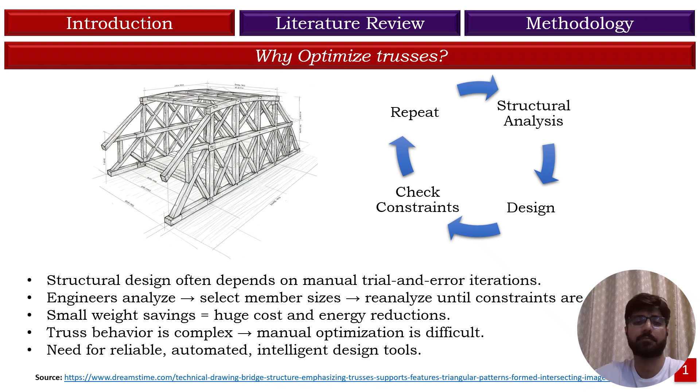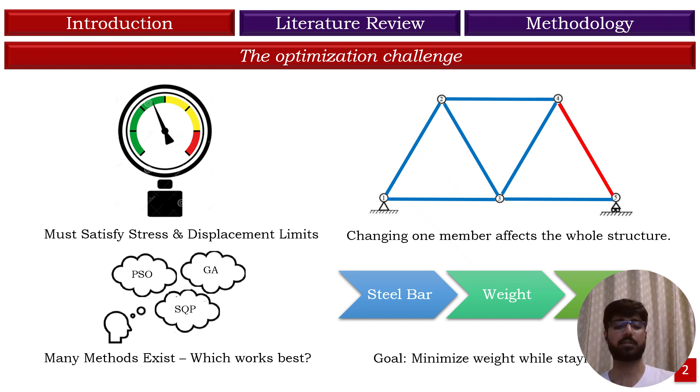The next question is why truss optimization itself is a challenge. First, every truss must satisfy strict stress and displacement constraints. Secondly, the truss members are highly interdependent. Furthermore, there are many optimization methods available, but there is no clear answer on which performs the best. And finally, the objective remains the same: to minimize structural weight while satisfying all constraints. These challenges set the stage for my research, a comparative evaluation of different optimization methods.

Based on the identified challenges, the objectives are to implement SQP using MATLAB's fmincon, along with genetic algorithm and particle swarm optimization methods, for truss sizing optimization. Second is to have a comparison of these gradient-based and meta-heuristic approaches. Third is to evaluate these methods using standard benchmark truss problems. And finally, to assess each algorithm in terms of minimum achievable weight, convergence behavior, and computational time.

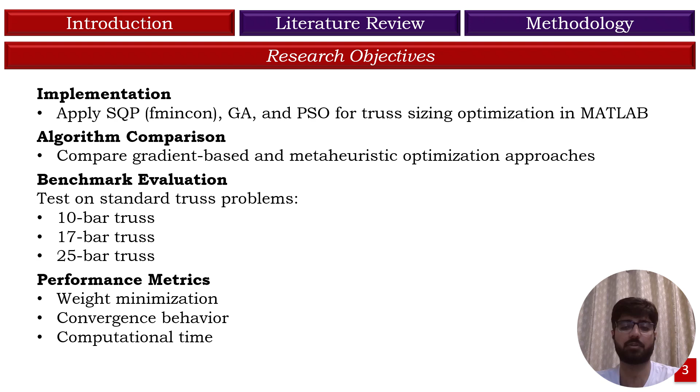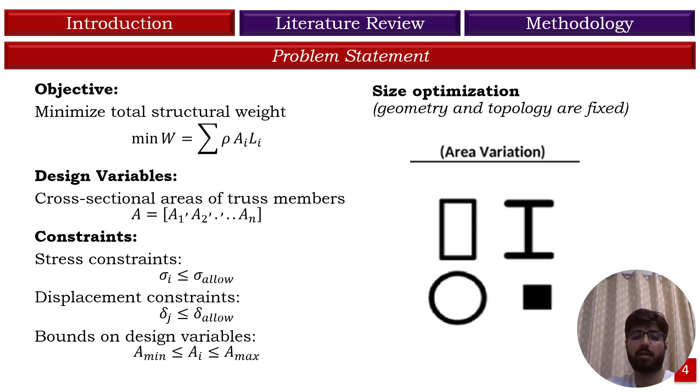Now let me formally define the problem addressed in this study. The objective is to minimize the total weight of the truss structure. Here I have focused on size optimization, in which we can only change the cross-sectional area of the members. Each design must satisfy stress and displacement constraints. Additionally, practical lower and upper bounds are imposed on the member areas.

There are two main families of algorithms: gradient-based and meta-heuristics. Gradient-based methods rely on mathematical derivatives, while meta-heuristic methods explore the design space more freely using rules inspired by nature. In this study, I have used three algorithms, each with a different personality.

Let's start with SQP, which is a gradient-based method. Imagine you are standing on a mountain trying to reach the lowest valley. SQP looks around, estimates the shape and slope of the ground, and takes a carefully calculated step downhill. After each step, it reassesses the landscape and updates its plan. This makes SQP precise and efficient. But the catch is, if the valley it finds is only a small dip and not the deepest one, it may get stuck there.

Next, we have genetic algorithm, which is like nature. It evolves the design through trial, error, and adaptation. You start with a bunch of truss designs, each slightly different. You test all of them, keep the best ones, mix their genes to create new designs, and even add small mutations. Over generations, weak designs disappear and strong designs dominate. Because of this evolutionary process, it explores the entire search space. It can find hidden valleys that even SQP cannot. But it takes time because it tests many designs before settling for the best one.

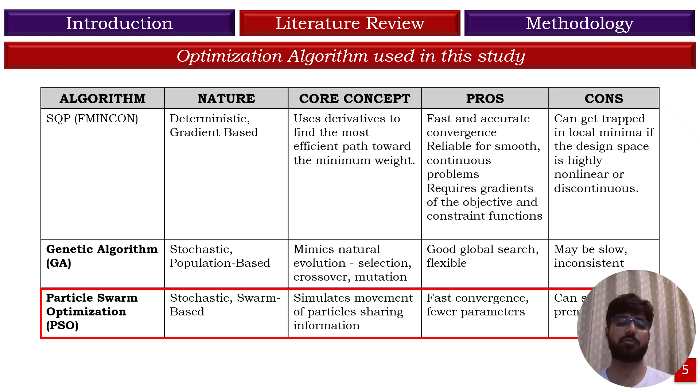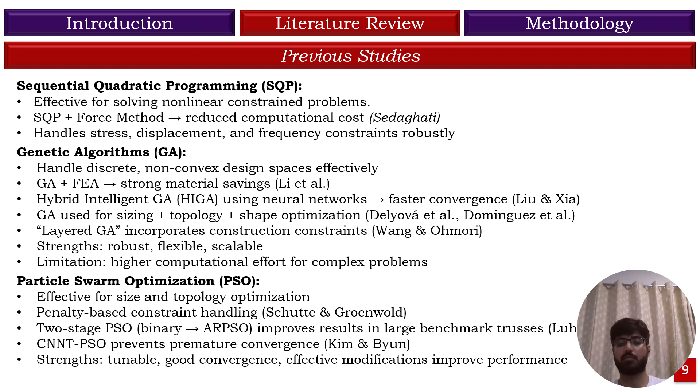This slide summarizes the main optimization methods for truss design and where my work fits. SQP is very efficient for nonlinear constraint problems, offering fast convergence and reliable handling of stress and displacement constraints. GA is widely used for discrete and multimodal design spaces and is flexible and powerful but computationally intensive. Particle swarm optimization is popular for sizing and topology optimization with good convergence and tunability.

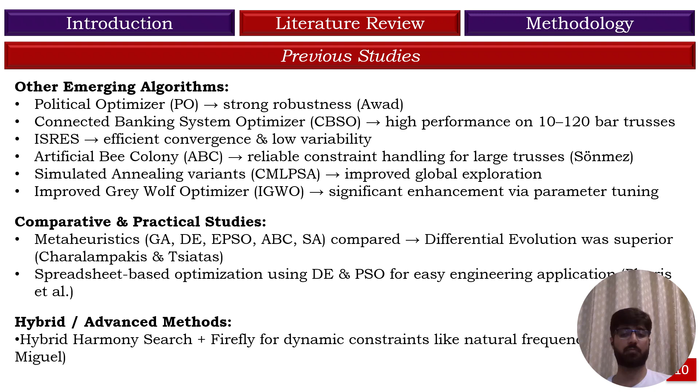Beyond GA and PSO, researchers have explored many newer meta-heuristic algorithms such as political optimizers, CBSO, and advanced simulated annealing. These methods perform well for larger or more complex truss problems. Comparative studies indicate that differential evolution frequently outperforms others in robustness and scalability. We also have hybrid methods which combine the strengths of two different algorithms. Overall, a wide range of algorithms exist, but their performance depends on parameter tuning and problem complexity.

So, how do we overcome the limitations of manual trial and error? Instead of adjusting each truss member manually, the algorithms automate the design process. The approach is straightforward: we define the design variables, compute the structural responses, evaluate the objective function, and let the algorithm intelligently update the design. This cycle repeats automatically until convergence is achieved. The outcome is much faster compared to the traditional manual approach.

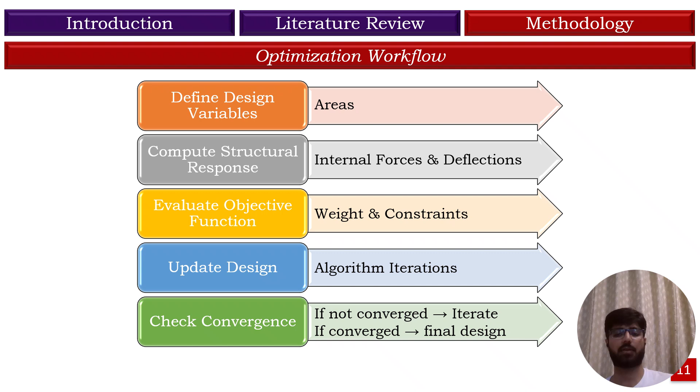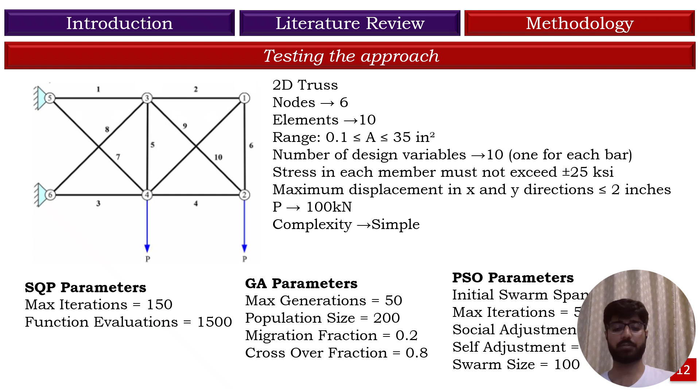Now, to test this automated workflow, we need a set of benchmark problems of increasing complexity. We start with the 10-bar planar truss. It is a classical benchmark problem, simple and well studied. It has 10 different design variables, and the area of each can vary between 0.10 to 35 inch square. We have two constraints here: displacement and stress. We have a load of 100 kilonewton applied at nodes 2 and 4. At the end, we have the parameters that we are using for different algorithms in MATLAB.

This slide summarizes the optimization setup for the 2D 17-bar truss, which is more complex than the previous one. This truss has 9 nodes and 17 elements, with each bar's cross-sectional area treated as an independent design variable, giving us a total of 17 design variables. The areas can vary between 0.1 and 50 inch square. The design constraints of stress and displacement ensure safety and serviceability. At the bottom, you can see the parameters chosen for the three algorithms for this problem to balance solution accuracy and computational efficiency for this more complex truss.

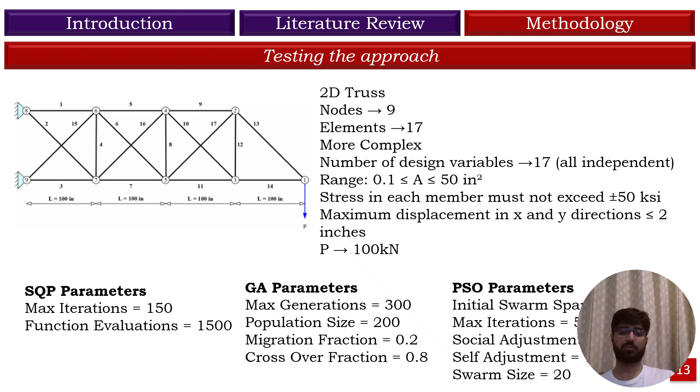Lastly, we have the 25-bar 3D tower truss. It has 10 nodes and 25 elements. The elements are grouped into sections, so we have 8 different independent design variables.

The area varies between 0.01 to 35 inch square. The compressive stress limit is uniform, while the tensile stress is different for all the design variables. The structure is subjected to two independent loading conditions, which adds to the complexity.

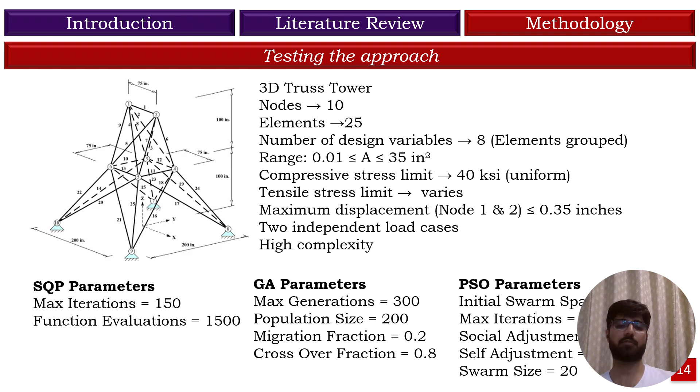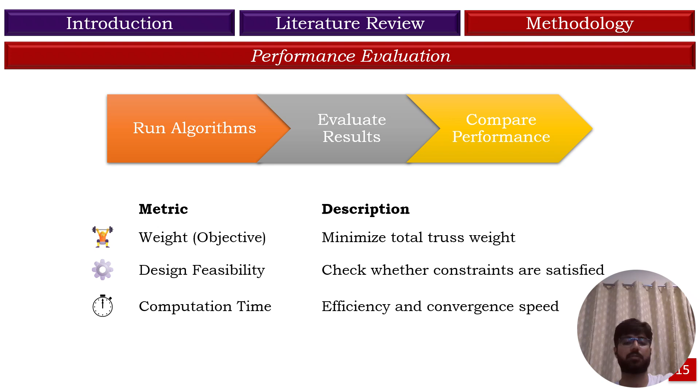By testing across these problems, we can evaluate each algorithm in terms of weight reduction, success rate, and computation time. To determine which algorithm performs the best, we had three key performance measures. GA and PSO were tested on all three truss problems 10 times to reduce randomness. Our first performance measure was weight, which was our main goal. Second was constraint satisfaction, and finally the third was the time it takes to converge for the algorithm.

The optimization results for the 10-bar truss problem demonstrate the performance of the three algorithms used. All algorithms produced fully feasible designs, satisfying the constraints. In terms of accuracy, both SQP and PSO were able to converge to the nearly best known solution from literature, highlighting their precision, while GA produced heavier results and showed more variability across runs, which is typical for a population-based evolutionary algorithm.

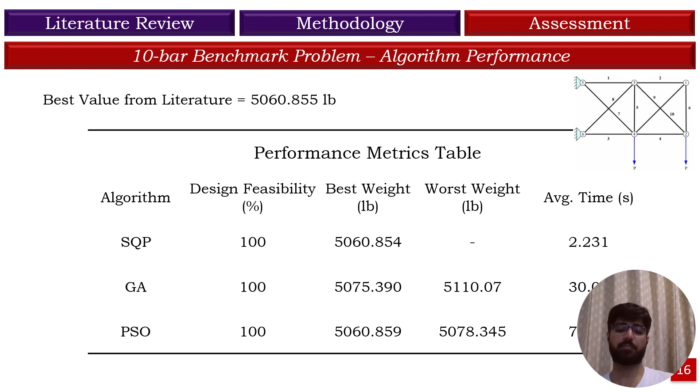SQP is the fastest here, followed by PSO, while GA needs some time to converge.

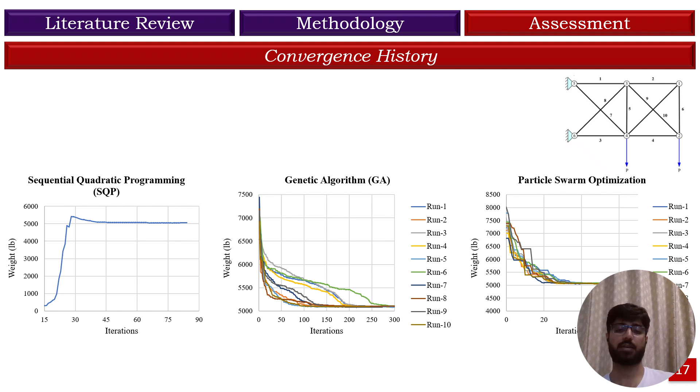These graphs show that all three algorithms converge to a similar minimum structural weight, but with different convergence speed and robustness. The SQP curve starts from a low weight and rapidly increases to a feasible design. The GA curve shows 10 independent runs, all starting from high weight, gradually decreasing towards the optimum value. Convergence is slower and more stochastic, but GA explores the design space broadly. PSO runs also start from high weight and drop steeply, reaching a near optimal weight typically in fewer than 40-50 iterations, which is faster than GA.

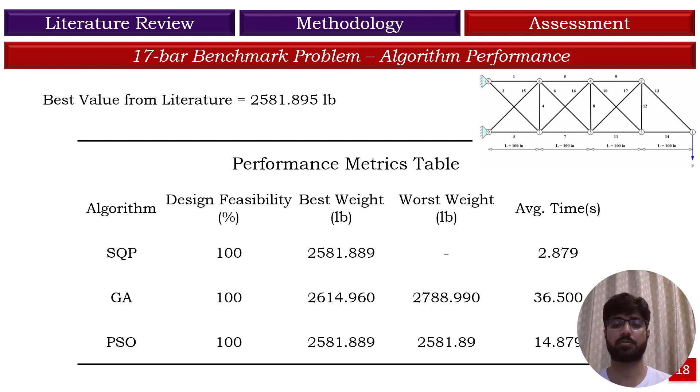SQP remains the fastest. PSO required about 15 seconds, while GA was the slowest at over 30 seconds due to its iterative evolution. This slide shows the convergence history of the 17-bar truss problem.

Here, GA shows a very sharp initial drop, shedding most of its weight within the first 25-50 iterations. PSO converges much faster in terms of iteration count compared to GA. It reaches the stable minimum in 60-70 iterations, and the stair step in PSO indicates that the swarm is finding a new local optima.

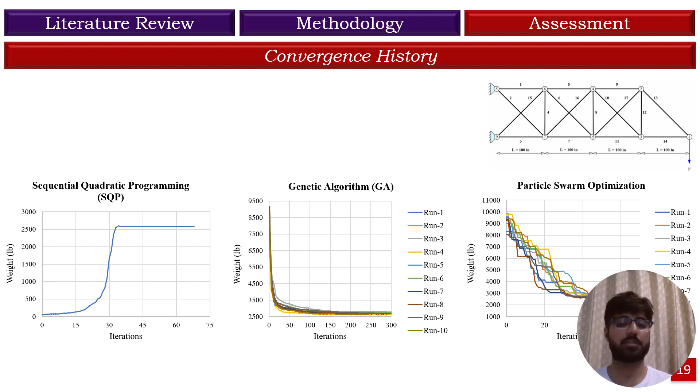The graph of SQP is most distinct. Unlike the meta-heuristics, SQP appears to start from a low, potentially infeasible point and increases the weight to satisfy the constraints.

For the 3D truss problems, all three algorithms satisfied the constraints, achieving 100% design feasibility. SQP produced the most accurate results, followed by GA and PSO. In terms of computational efficiency, SQP is the fastest, followed by PSO, while GA is the slowest. The results highlight how algorithm choice affects both performance and computational cost, especially as complexity increases.

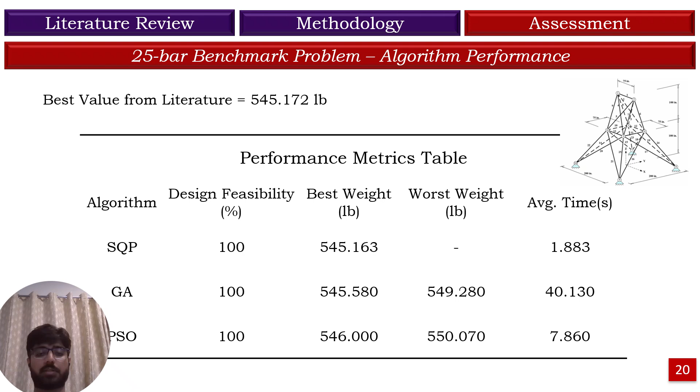This shows the convergence history of the 25-bar truss tower. The GA chart shows a sharp initial decrease in weight within the first 50 iterations. There is a visible spread between the 10 runs during the middle phase. It requires more computational effort compared to PSO and SQP.

Unlike GA, the ten runs of PSO are extremely consistent, with all paths merging by the 75th iteration. The stair step here also suggests that the swarm is discovering better regions. SQP starts from a very low weight and increases the weight to satisfy structural constraints.

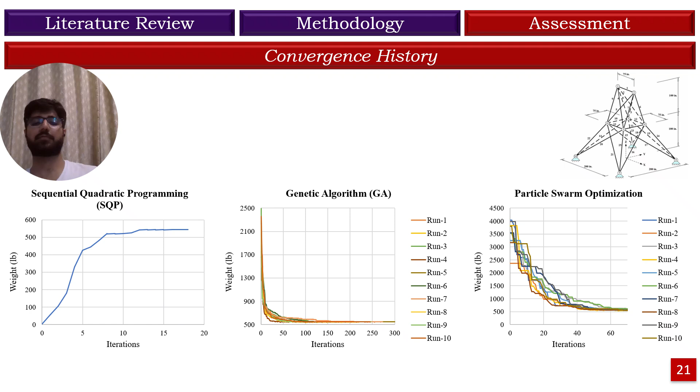Traditionally, structural design relied heavily on a manual trial and error approach. This process is very time consuming. So modern optimization methods transform this by automatically evaluating thousands of design alternatives. As a result, optimization represents a critical advancement in structural engineering.

Based on our results, SQP is the fastest. While it is best for well-behaved problems, it can struggle with extreme nonlinearities like buckling or conflicting load cases. PSO delivers results that are as light as SQP, and GA explores the design space more widely. The critical point of my presentation is that no algorithm is inherently bad. Their performance is dependent upon parameters. Fine-tuning these parameters could potentially match or exceed their current performance.

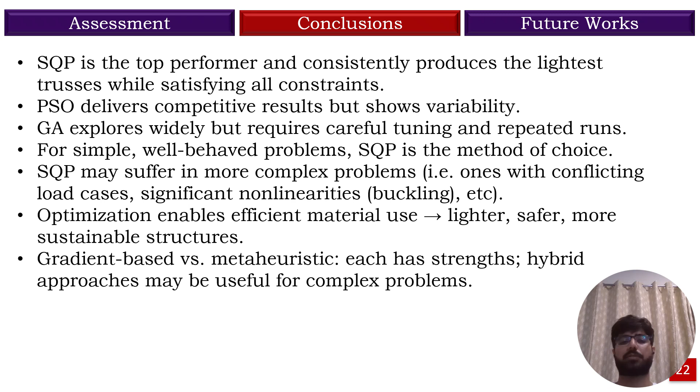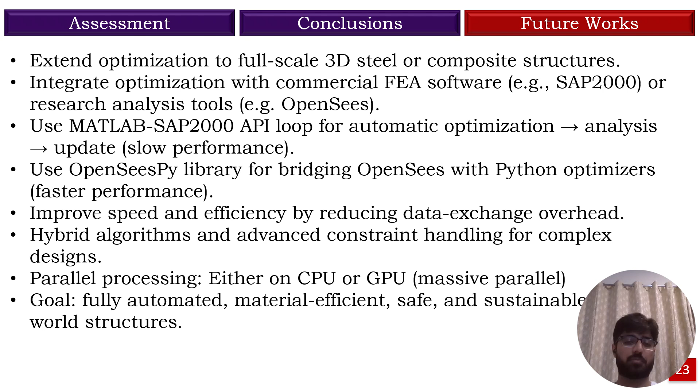For future work, this optimization framework can be extended to a full-scale 3D steel structure. Another approach is integrating optimization algorithms with commercial finite element tools like SAP2000 or research platforms like OpenSees using APIs and Python-based optimizers. The ultimate goal is a fully automated system that produces a material efficient, safe, and sustainable design for real world problems. That's it from my side. Thank you very much.